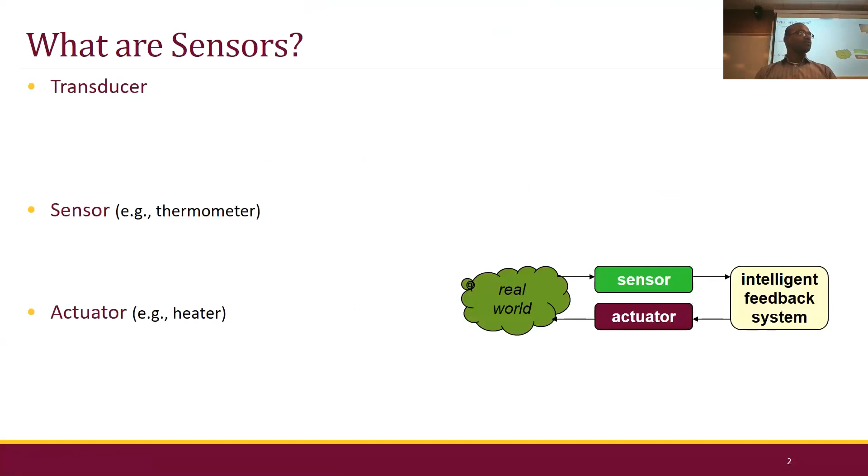It's a device that converts some kind of energy that we have into a corresponding electrical signal. The whole point is, if you're trying to acquire temperature in this room, we've got to use some kind of thermistor or resistor or thermocouple that takes the energy in the air and transforms it to an electrical signal, so we can process it, analyze it, and take an action from there.

Okay. So when we say transducers, there are two types here. The first one here is a sensor. A sensor takes a signal from the real world, something like temperature or humidity, and converts it to an electrical signal and gives it to something like a microprocessor. That is the first one.

The second one is an actuator, something like a heater or a motor that can take electrical signals from the microcontroller and process it. If you want to activate a motor to turn it on, or turn on a heater to warm up your room, you can do that. So transducers are basically two things: sensors or actuators. So for an IoT system, which one do we need?

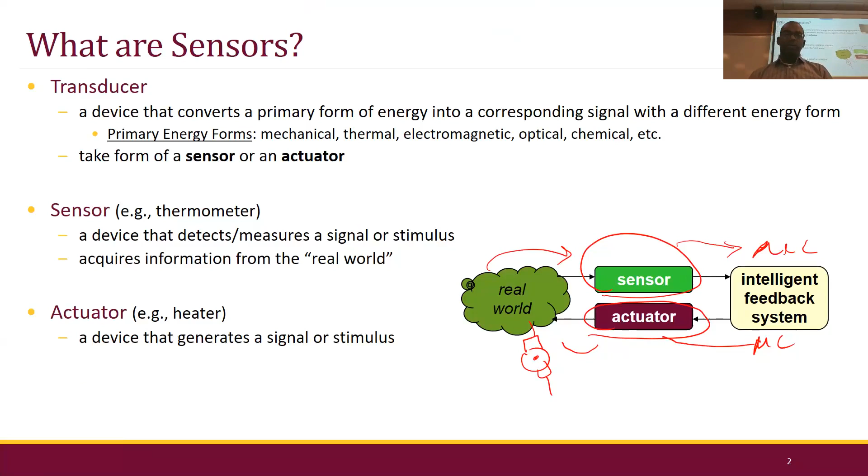So now we're talking about sensors. There are two types of sensors: the primary transducer and the secondary transducer. The primary transducer takes the real world data and converts that into some kind of electrical signals, right? It converts it to some kind of an analog signal, an analog voltage or current signal. And the secondary transducer will take particular values in the analog signal and convert them to something like 0, 1, 1, 0, 1, 1, 0, 0. It converts it to some kind of a digital form.

Do we need to convert it to a digital form? Yes? No? Why? We are giving all the signals to a microcontroller, right? Microcontroller, what is it, analog or digital? It's digital. So do we have an analog microcontroller? Is it possible to design one? You can have analog and digital inputs, you're right. But can we design a microcontroller that operates purely on analog-based signals? No.

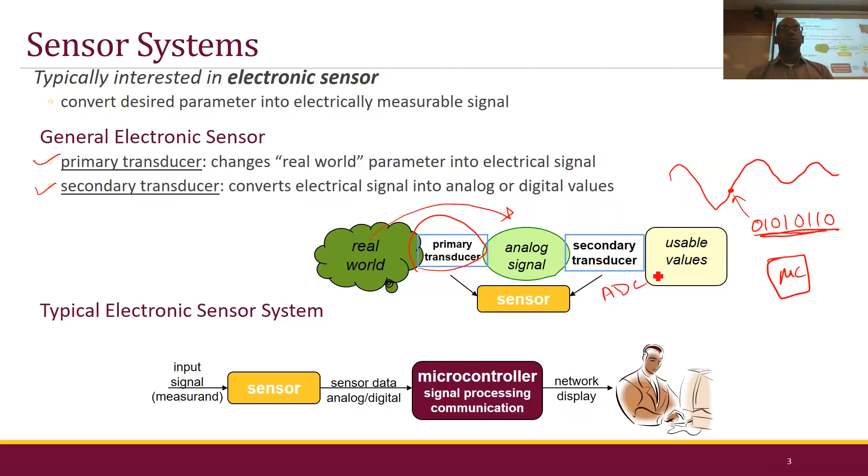So, what kind of data can we obtain and what kind of sensors do we have? We can obtain data such as my voice. My voice is an acoustic signal. We can acquire that, which is what this microphone is doing right now. This microphone is acquiring my voice and converting that to an electronic signal inside. That is converted to a digital format through the USB and goes to the computer. So we have one signal right here.

How about biological or chemical? Are they important? Yes? No? Yes. How about optical? Light. Is light important? Especially if you're driving in the middle of the night and you don't turn on your lights. Most of the time when I'm driving, I forget to turn on my lights.

And you have cars now that can sense the light outside and turn on the lights automatically for you, right? When you drive across states, in some places the regulations to turn on your car lights in moderate darkness are very strict. Michigan is very lenient, but go to Ohio: if the light levels are moderately low, you're required to turn on the lights, and if you don't, you get a ticket. So Ford Motor Company and other automakers try to automate the systems, one less thing for us to do. So electrical signals, there are light signals.

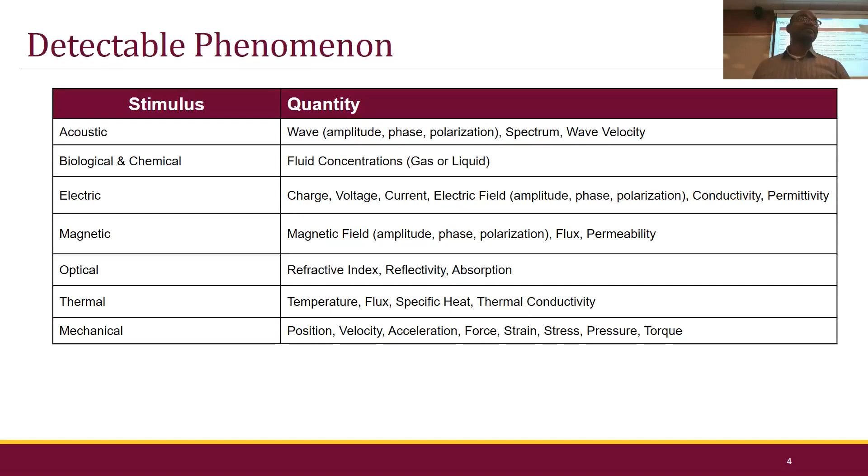How about mechanical signals, guys? Can we acquire mechanical signals? Like the speed of your car, or velocity, or how fast you're braking. Is that important? Let's say you're driving and you hit someone, and that information is not acquired, will your airbags deploy? Yes? No. So there are different signals, right? Sensors are very important, is what you're saying.

Oh boy, looks like we have a problem there. Dr. Walsh, you hear? No. We can hear you.

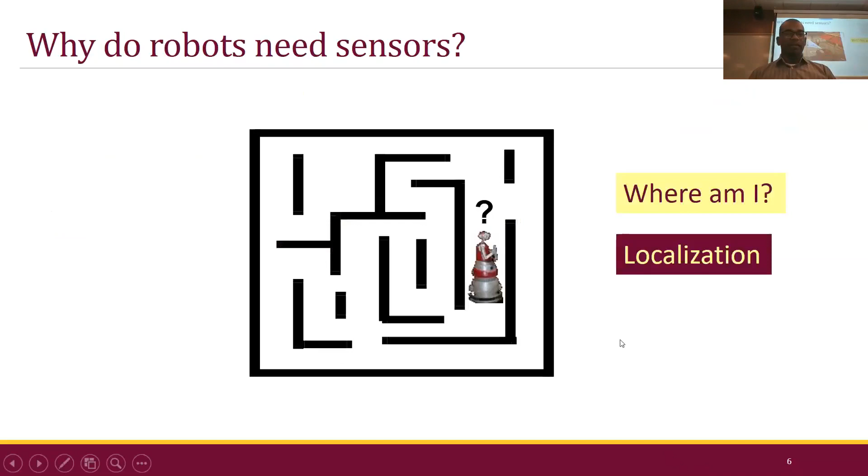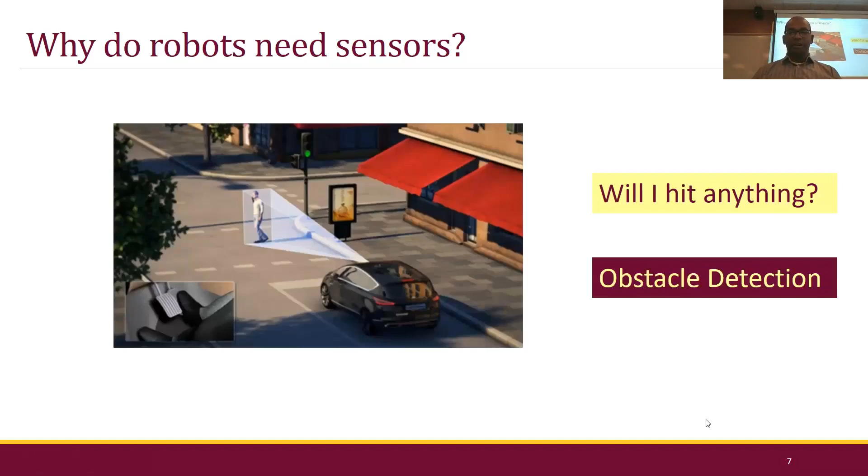Okay, now how about cars? If you're driving autonomous cars, think about an autonomous car. You sit in the car, and it's driving autonomously with no sensors, and next thing you know, your car and you both together are in a junkyard, right? So we have to know what's in front of us all the time. Are we going to hit something? We've got to know if there is any obstacle in the path. Okay?

Now, how about in agriculture? Agriculture is done predominantly by humans right now, but we are going to the mode of automation. How can sensors be used in automation? Yeah, right now it is just beginning, but there are farms where, for example, if you have oranges on a tree, oranges do not grow in a particular area of the tree, right? They grow all around. If you take two trees, the placement of the oranges is not uniform. The shapes and sizes are different too, and the ripening time is also different.

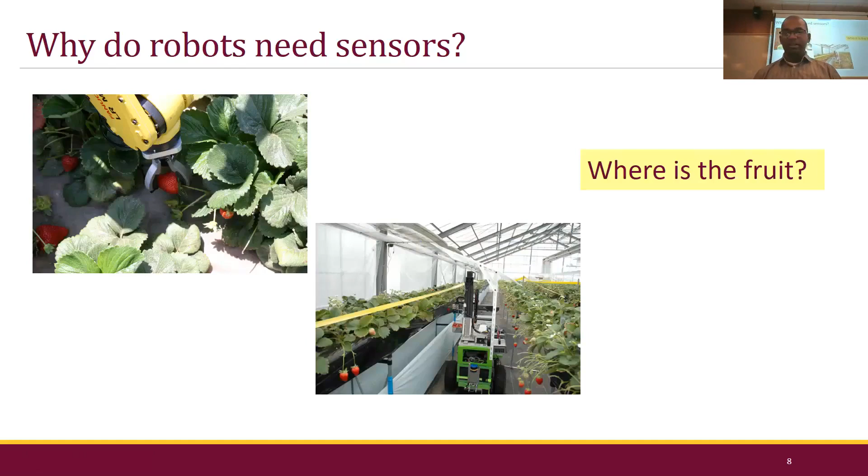Okay. And the point is, increase the yield rate, because do we waste a lot of food? Yes, a lot, right? And that is where things are going right now. Automation to increase the yield rate, minimize the wastage. Autonomous harvesting is where we're going.

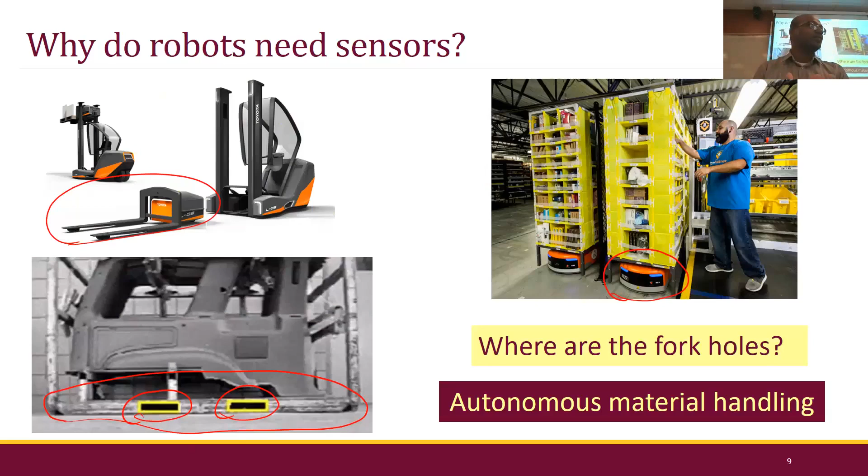What kind of sensors do we use for finding the holes in the pallets? Proximity sensors, yes. What else? We have to see the holes, right? The forklift or the robot should literally know its location. Proximity tells you how far you are, but you'd have to identify the precise location. So you need some kind of vision, some kind of acoustic signals as well. Okay, we'll talk more on that slowly. Okay, how about for something like this?

On the right side, this is a project done by Microsoft, one of the recent projects. On the left side, we can just identify the faces, right? Here, we are identifying the faces and we can recognize if there is a human or not. But look at the right side image. There is a number and there is an image corresponding to each face.

What does it say here? Male or female, and age. Think about it. Yeah, in a way it is creepy, I agree. But there is a lot of information that you can obtain, right? If you're in a business sector, if you're trying to acquire information, there is a lot of intelligence that you can input.

And by the way, guys, it is not new. This was done 2 years ago. Microsoft actually does this right now. If you want, you can download software that can do this for you. I don't know the name of the software, but a quick Google will let you find it.

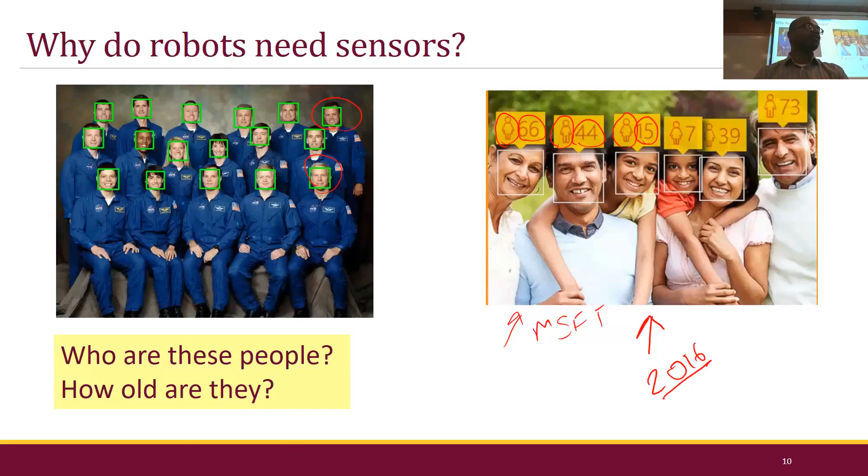Okay, face detection and tracking. So now we have seen the applications. Now, let's talk about a temperature sensor. For temperature sensors, there are basically 3 different types: a resistance temperature detector, thermistors, and thermocouples. So do we use any one of these in our day-to-day life, guys? Which one do we use? Does anybody know what any one of these is? Which one do you know?

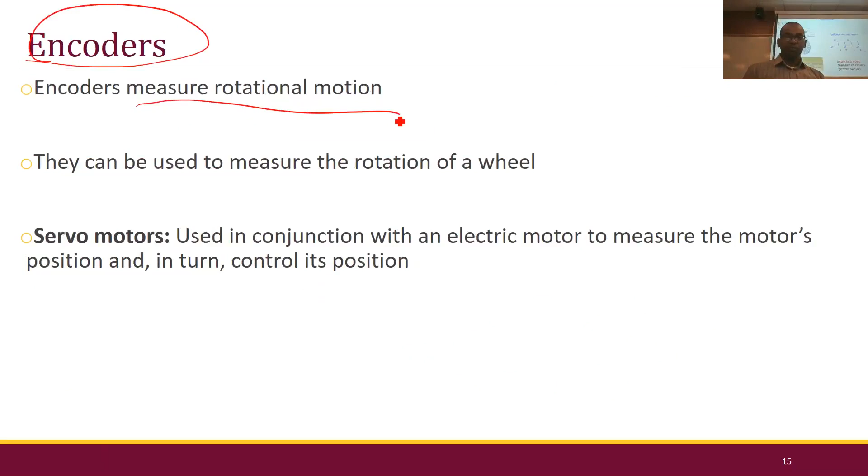Let's talk about these encoders for a second. What are encoders? Encoders are nothing but sensors that measure the rotational motion. Say, for example, if you have a robot with wheels, and the wheels are moving, and you want to know how far the robot has traveled, or you want to have a robot go a certain distance. The wheel is connected to a motor, right? And can you tell the motor to go a certain distance and stop?

The motor requires only one electrical signal, and the electrical signal is move or stop, right? Turn on or off. But how would you tell it? Or how would you measure how much it moved? So if you have a robot start at a location, it is moving, and I want to measure the distance it moved, how do I do that? We use something called encoders.

Did you guys use encoders before? No? How about the students at WIT? Have you come across encoders before yet? Not with me, anyway. No? Okay. So, let's go with this then. It's a fairly simple concept, guys.

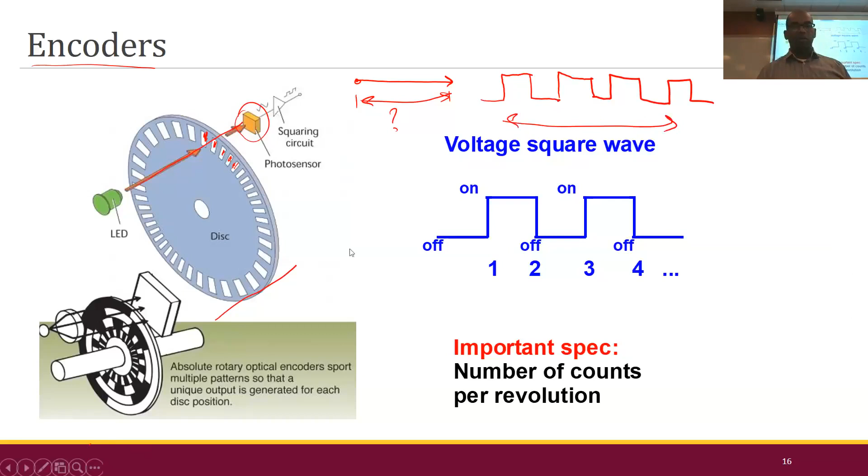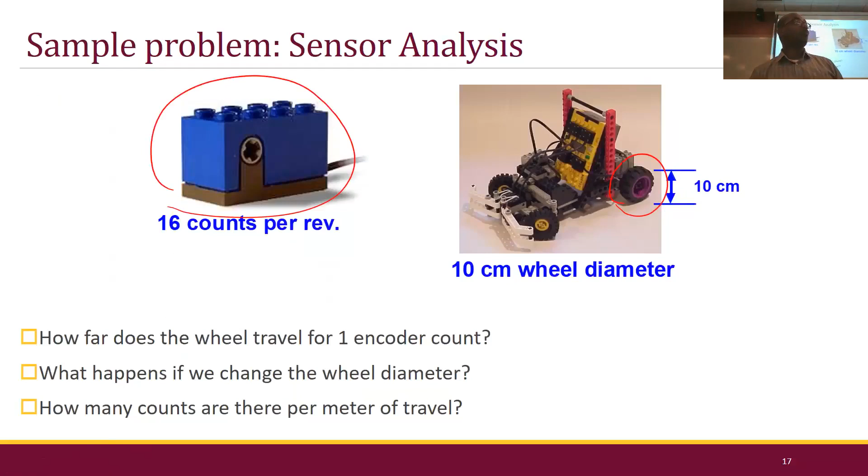So that is how your encoders work. Let's do a simple math here. Here is a simple robot. On the right side, the diameter of the wheel is 10 centimeters, and this encoder is inserted here. I want to know three things: how far does the wheel travel for one encoder count? What happens if the wheel diameter changes? And if I want to travel 1 meter, how many counts should I be getting? How do we do this? The diameter is 10 centimeters, right? And what would be the circumference of the wheel?

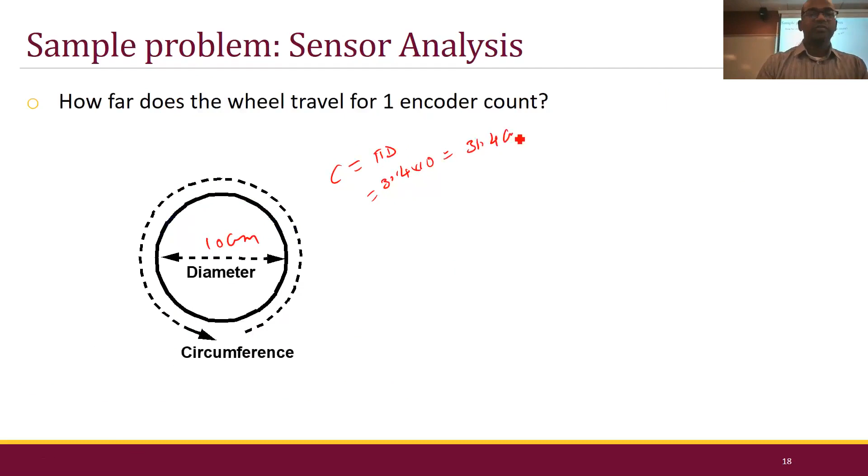Pi d, yes? So this is going to be 3.14 multiplied by 10, which gives you 31.4 centimeters. Yes? So that is 16 ticks, right? The encoder has 16 ticks. So how much would one tick be equal to? 31.4 divided by 16. One tick, or one light sensor value, is about 1.9. I can't see, my recorder button is up here, so I can't see the value. 1.96 probably. Yep.

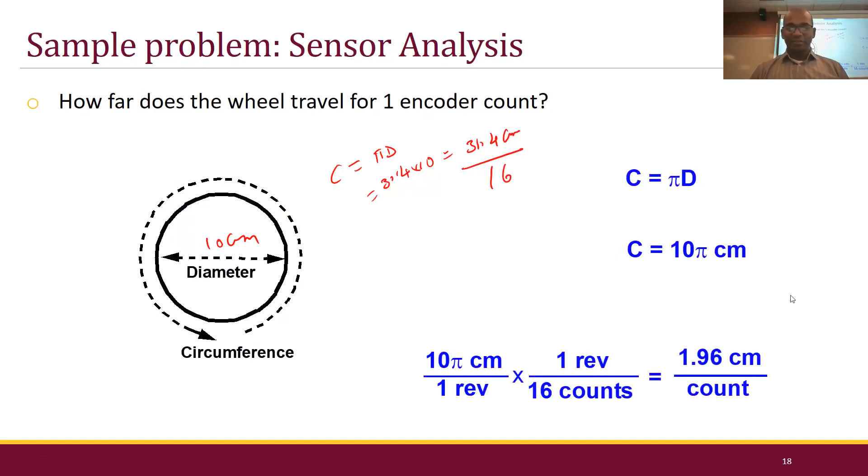Okay. So now, suppose I want to move 1 centimeter per count. How do we change it? One centimeter per count. Should our wheel diameter be the same, or should it be different? Different, and that is how you get it. Okay? There we go.

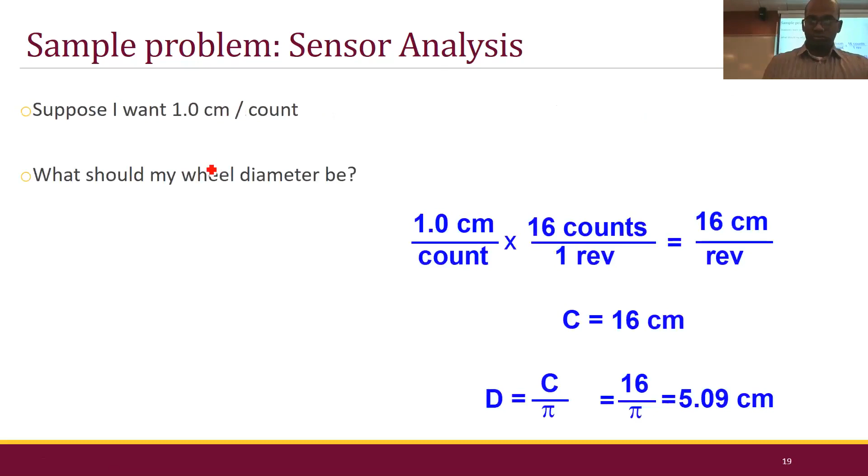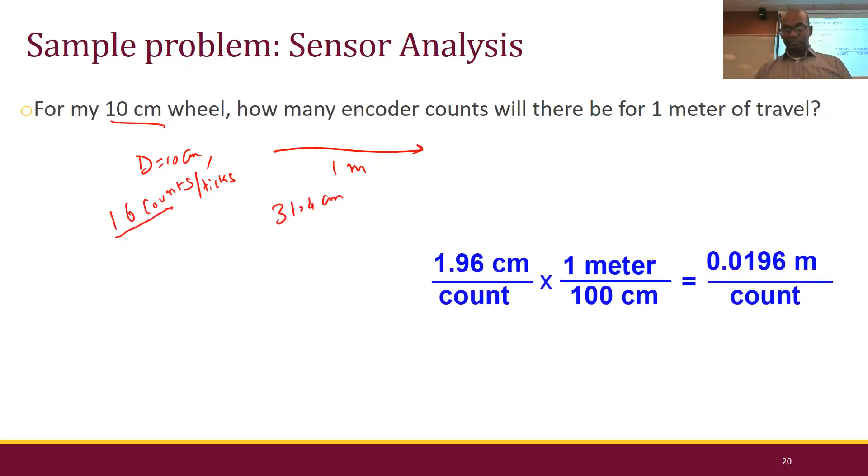Okay. Now, let's say I have the same wheel that is 10 centimeters. How many encoder counts will there be for a distance of 1 meter? So we have a diameter of 10 centimeters, right? And we want a distance of 1 meter. And what we found is there are 16 counts or ticks in the encoder, right? So once it does 16 counts, it travels 31.4 centimeters. So if I want 1 meter, how many encoder counts will I need? You need about 51 counts per meter.

Okay. So if you have a robot and you need the robot to go a certain distance, can you do this math? If you know the diameter of your wheel and the number of ticks on your encoder, can you make the robot go a precise amount of distance? Yes? Okay.

Now, a very simple question. Let's say I have a robot with 2 wheels, and I want both wheels to go straight. How do I control the speed of the wheels if I want it to go literally straight? Do I put my velocity, my speed and the distance as the same for both, or opposite for both, or what? I have a 2-wheeled robot. I want it to go literally straight. The 2 wheels are connected to 2 independent motors. What happens if the motor velocity is different?

Okay, so let me ask you this question. It is not related to encoders, but thinking along these lines. If I have 2 wheels and the left motor moves faster compared to the right motor, what happens? If the left motor moves faster, it turns to the right. If the right motor moves faster compared to the left motor, it turns left, okay?

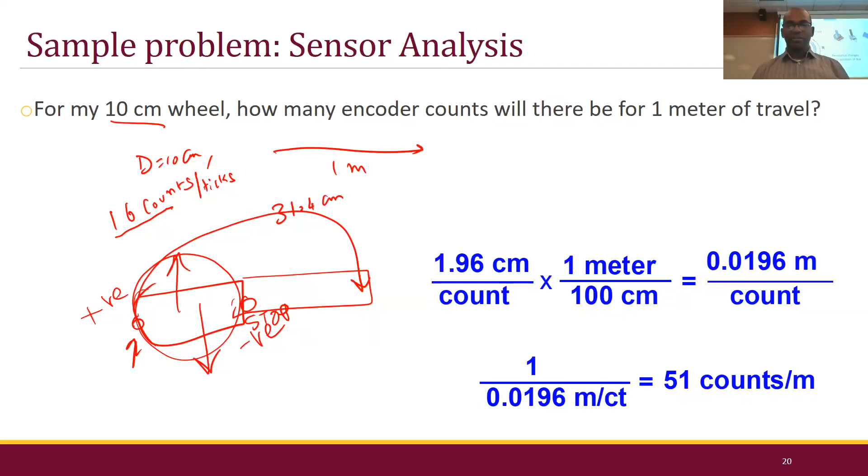Dr. Walsh, are we doing okay on time, or are we short on time? You've got about another 10 minutes, I'd say, before these guys will be heading for the door. Okay, we'll make it quick then.

So, what is a potentiometer, guys? Adjustable resistance. So, what we know is if this is a resistance of 10 ohms, and I plug in one more 10 ohms, what is my total resistance? This is 20, right? And if I put another 10 ohm resistor, that becomes 30. So a potentiometer is nothing but a series of small resistors put together. Yes?

I'm trying to explain it to the computer science folks here as well. So the electrical engineers will not agree with me 100%, but can we say that? Is it equivalent? Taking small resistors and hooking them in a series, would we get a long resistance? Yes? It's a simple concept, right? If I have this whole thing as a resistor, right?

Okay. And a resistor here, how many terminals does it have? 2 terminals, right? This is terminal A, this is terminal B, yes? And here is my terminal A, and this is my terminal B here, okay? So what I'm saying is, this needle here, the needle can rotate here, or the needle can be like that as well.

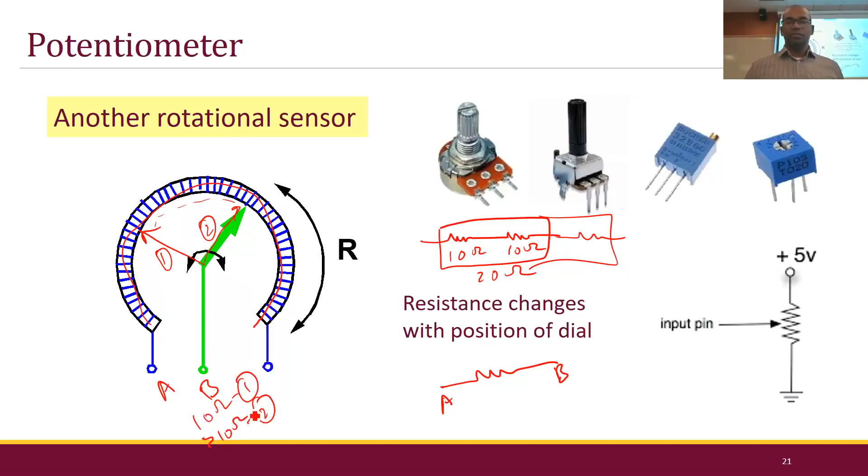So if I'm measuring the resistance between A and B here, and this is position 1, and this is position 2, okay? If my resistance between A and B is, let's say, 10 ohms in position 1, what would be the approximate resistance between A and B in position 2? Higher, lower, same? More than 10 ohms, yes? That is a simple potentiometer here. Okay? Where would we need it?

If I put a thermistor, there is a bend sensor, there's a force sensor, the more I twist it, right, the resistance varies. And if I know the relation between the resistance and my bend, can I know the precise location of the hands? Yes? No? Very much like calibrating your thermistor. Can we calibrate a variable resistance that I put on my hand and know the angle at which my fingers twist and turn? Yes? Same thing here. Okay. So, probably, let's skip this as well.

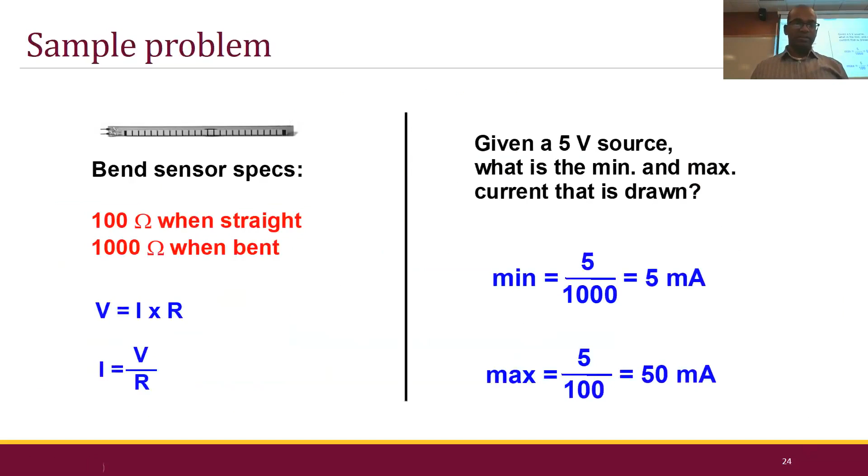Accelerometers, guys, we'll talk about this and probably we'll stop for them and we will continue. Accelerometers. Let's talk about this. Is this an important sensor or not so important? In the lift, okay. And do we all carry accelerometers with us right now or are we not? Do we have some kind of accelerometers in our pockets right now? Phones, guys, your cell phone. Does your phone have accelerometers? Why do they have an accelerometer? What can they do?

Anybody here? What does an accelerometer do on your phone? What is it used for? Yeah, for landscape, portrait. You can detect whether it's facing down or facing up. Yeah, the cell phone can tell you if you're facing up or facing down. And Scout, you're saying something about accelerometers? I was just saying, it's got the heart monitor, it's got all that stuff you want to track. The heart monitor? Oh, the cell phone.

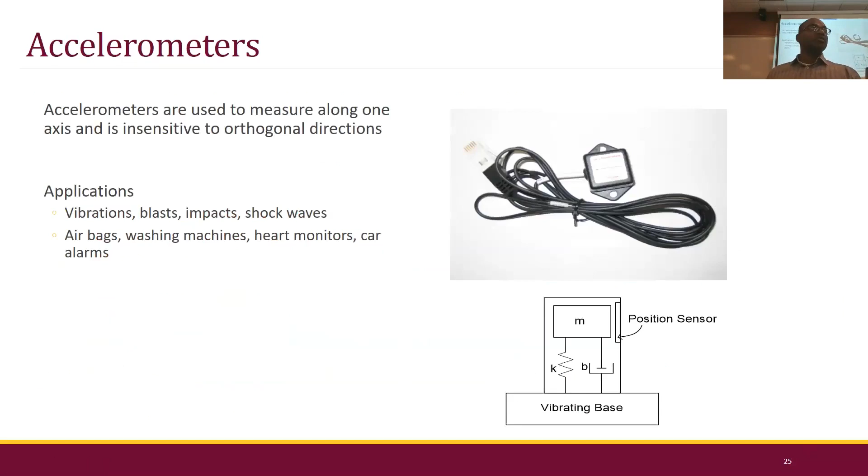Yeah. Okay. So you have the heart rate sensor in the cell phone right now, and combine that with the accelerometer, you can say, for example, is it a result of your running, or is it a result of some health issues, right? So yeah, you can use that. But how does it work? How does the accelerometer work? Changes around the axis, but how does it physically work? What's inside? The accelerometer can sense in 3 axes, right? It can sense movement in x direction, in y, and also z.

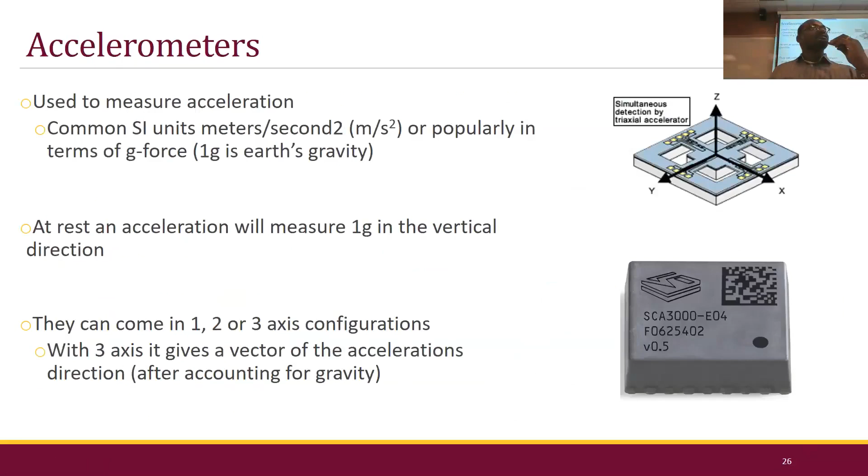So if it is moving, what happens? Think about this, guys. This is a metal plate. This is a metal plate. And there is some insulation in between. What did we form? Two metal plates separated by some insulation in between. A capacitor here, right? Again, a metal plate here, a metal plate here. There is some insulation in between. What do we form? A capacitor, right?

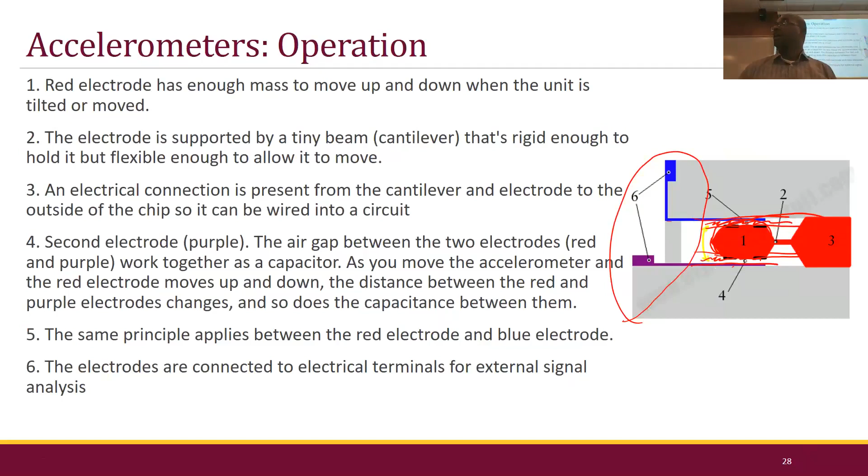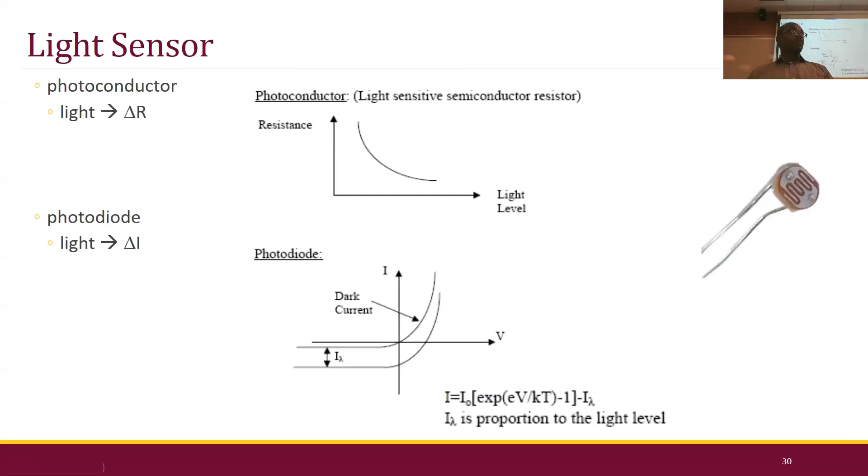We talked about the applications of accelerometers. Let's do quickly light sensors. We said we use light sensors in, for example, your cars. How about the classrooms? Or how about your household applications? Just to save energy, right? We use light sensors there. Or how about sonars? What is a sonar sensor? Are you familiar with sonars? How do they work?

Yeah, it sends an acoustic wave, just like a bat. It sends an acoustic wave, and it goes, hits something, reflects and comes back, and it takes some amount of time, right? The further the distance the signal has to go, is the time higher or lower? Higher, right? The further it has to travel, the longer it takes for the signal to come back.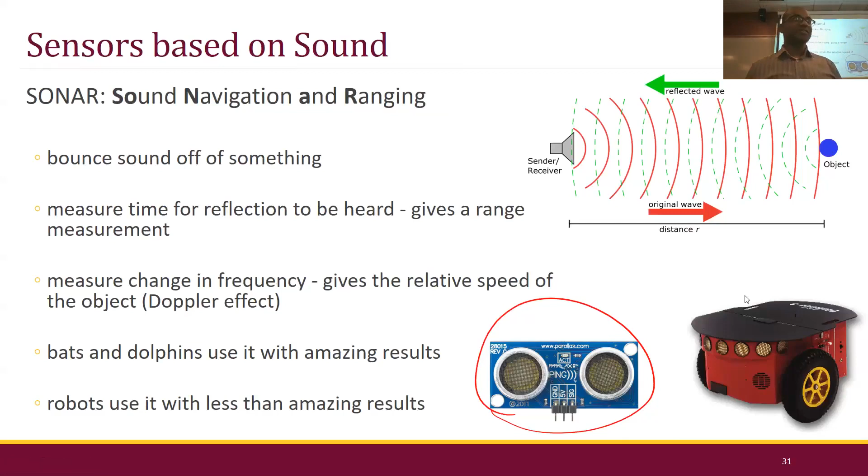Where do we see these sensors, by the way, in everyday applications now? Do we see them in cars right now or no? What are these used for in cars? Parking assistance. Exactly. That is one basic application we see.

Photo gates. What is a photo gate, guys? Anyone who worked in the manufacturing industry? So a photo gate is a simple IR transmitter and IR receiver here. It sends a signal from one end to the other, okay? And if you just want to count how many objects are moving through here, you can put a simple photo gate, and anytime there is no obstacle, the signal passes through, right?

On the other hand, if there is an obstacle here, no light passes through, right? So can you identify if there is an obstacle or not? And if you put this on a conveyor belt with a lot of items moving, can you count how many items are moving? Now on the top here, put a barcode reader. You have a photo gate, and you also put a barcode reader on the top. Would it have any application?

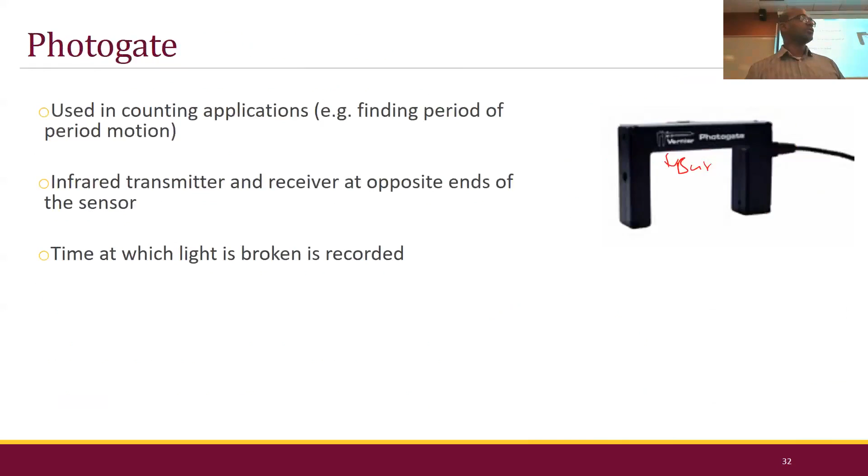Inventory, right? And this is kind of like what is being used in the Amazon warehouses to track the position of a box and send it to the appropriate chute and even load it on the appropriate truck. All this photo gate combined with systems in the warehouse will increase the speed of the shipments. Okay. I'll show you a video on that. Then we have gas sensors.

Okay. Now quickly, let's talk about connecting these sensors to microcontrollers. What we have seen is the sensor gives an electrical signal, at times analog, at times digital. We need to convert that to some kind of format your microprocessor accepts, right? And connecting here, we have to follow a protocol. What is a protocol, guys?

A set standard that you have to abide by, a set of rules that you have to abide by. Yes? Okay. And there are different protocols for connecting the different standards we can use, and we will talk about that. There are protocols. Oh, come on. Sorry, guys. There are protocols: UART, I2C, SPI. There are different protocols that we could use. Okay. We will learn about these protocols in a week or two.

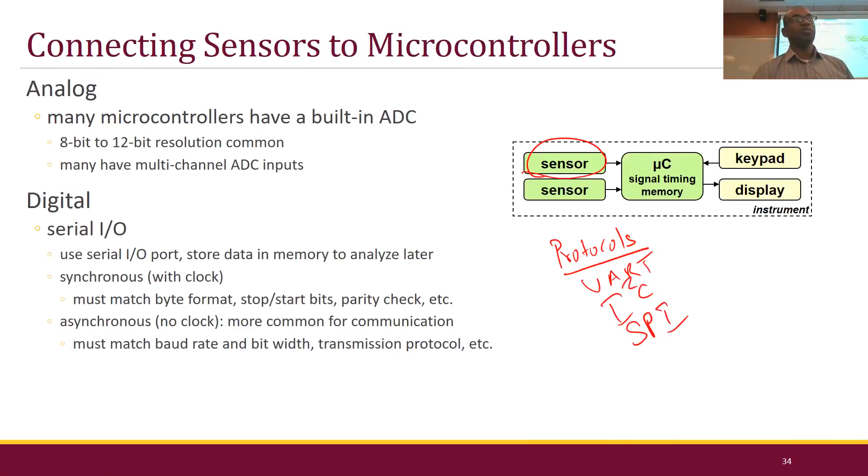Okay. And quickly, we'll talk about calibration also next week. But before we go, let me ask you this question here. I have three pictures here. One is low precision, low accuracy; high precision, low accuracy; high precision, high accuracy, right? So what I'm trying to say here is my plus sign is my actual value, right? So look at the difference here.

Both the first and the second one are low accuracy, right? So here, my precision is low and my accuracy is also low. My real value is here. My readings are all over the place. Okay. But look here on the second graph. The accuracy is very low. So the reality and the measurement are far off, but they're very precise, in the sense all these values are in one location.

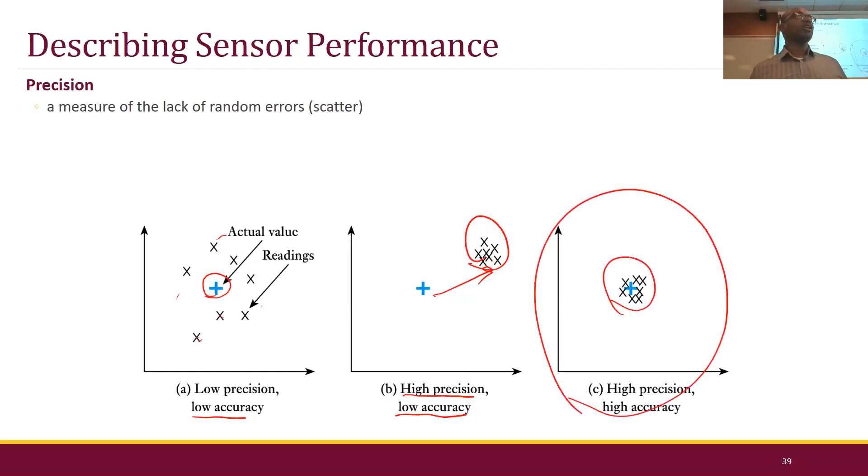Okay. Then the last one is higher accuracy and higher precision. Which one do you want in an ideal scenario? In an ideal scenario, you want high precision, high accuracy, right? But can you obtain that all the time? No. You got to trade off for something. Yeah? So, lastly, I'll ask you this.

Sensor fusion. For example, we talked about here in the cell phone, we use accelerometers and a heart rate sensor, right? Or even the Fitbits that we have, can we just use one sensor's data and make useful decisions? Or if I combine sensor data from different sensors, will it help us make better decisions? More sensors, like as we talked, if we have a heart rate sensor combined with an accelerometer, it can give us a context of why the heart rate is going up, right?

Or let's say in the room, if there is a temperature sensor and a PIR sensor, and the temperature is going up, you don't know what the reason is. But if a PIR sensor, a passive infrared sensor, is there, it can sense that there are a lot of people in the room. And if it says there are lots of people in the room and the temperature is going up, it gives you a context. Yes? And you can make an informed decision based on that. So we have to think about how we utilize this data efficiently and form a context around it. Okay, that is what we're talking about here.

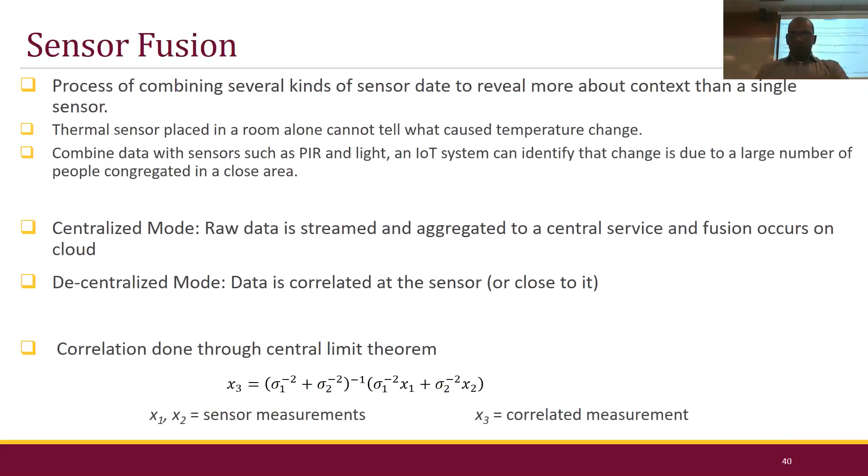So lastly, what I want to ask is this one. What are the different factors we got to consider in deciding what sensors to use? What are the factors we typically use as designers? What factors do we use, guys? Accuracy. Cost. How about physical size? Right? Precision. You need precision or no? You need precision. And how about ability to interface?

Like if the sensor says, I'm going to give out only analog signals, and you need digital. Or let's say it can interface only through wire, but you need some kind of wireless transmission. Yes? Or what about operating in different temperature ranges? Think about utilizing a small accelerometer next to the engine component under the hood of your car that cannot take much vibration. Or under the hood of your car near the engine, what is the temperature going to be? On an internal combustion engine, guys.

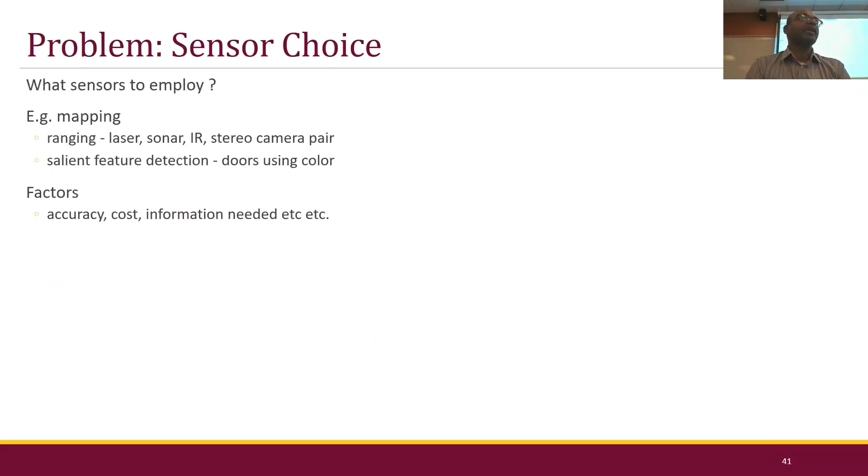I'm not talking about electric hybrids. Is it going to be low or high? Ben, you said pretty high, right? And if your accelerometer cannot take the temperature, will it work? It might work for the time being, but in no time, it's going to stop working, right? So there are different factors that we got to consider when choosing a sensor, okay? So probably with that, we'll stop.

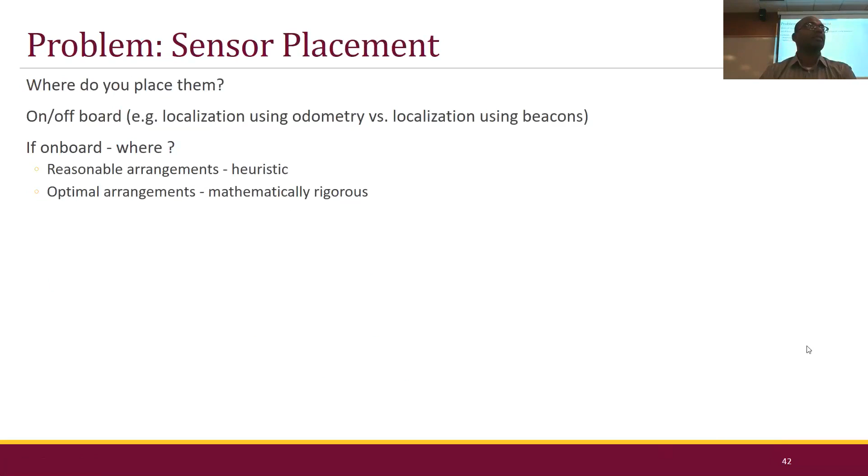And when we come back, we will talk about analog to digital converters, digital to analog converters, and after which we'll talk about interfacing sensors to the microcontrollers. Okay. So I'm stopping.